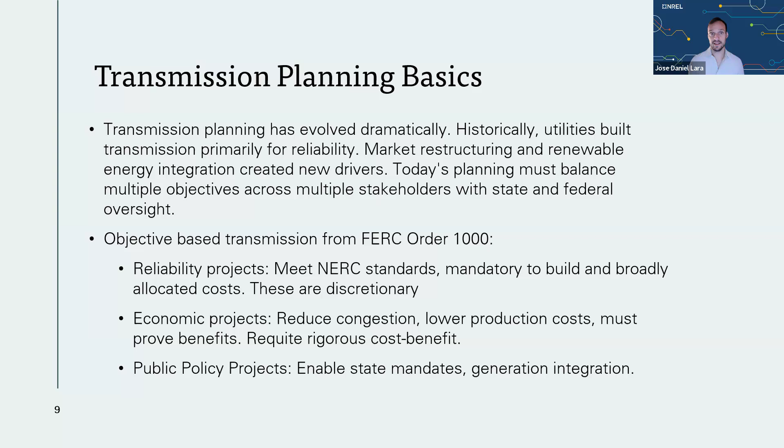And finally, we have public policy projects, which are projects that are required to enable state mandates or integrate generation and meet certain targets that states have according to their policies. So if we take this framework, we can now start understanding what kind of modeling and what kind of simulation is required in every different case to be able to answer the question of how do I assess my transmission planning effort. Let's go to the next slide.

So the other part that is important, which we're going to be talking about in this presentation, is this new terminology that shows up a lot, which is called GETs, and understanding how GETs get incorporated in transmission planning. We're going to look at the process, understanding that these technologies are operational. They change how the system operates, and how do we actually incorporate them as a way of evaluating costs and benefits. Also, we have to understand that GETs, depending on how they're deployed and in conjunction with a broader portfolio, can actually increase reliability and include cost benefits. So let's go to the next slide.

Right, so these types of technologies are more difficult to assess because they're meant to be operating more in the two other categories that are not reliability. They're economic projects and public policy projects. So the impact of GETs is more dynamic. It changes depending on the system conditions, and it changes depending on the requirements that we have at a particular location of the grid.

So modeling gets more difficult when we have to start including this level of operational detail, and understanding how just a couple of snapshots that are reliability based, as they're usually done by the utilities, might not be able to capture their full value. And we're going to discuss different techniques that we can implement to allow us to capture the value of GETs in different contexts. Go to the next slide.

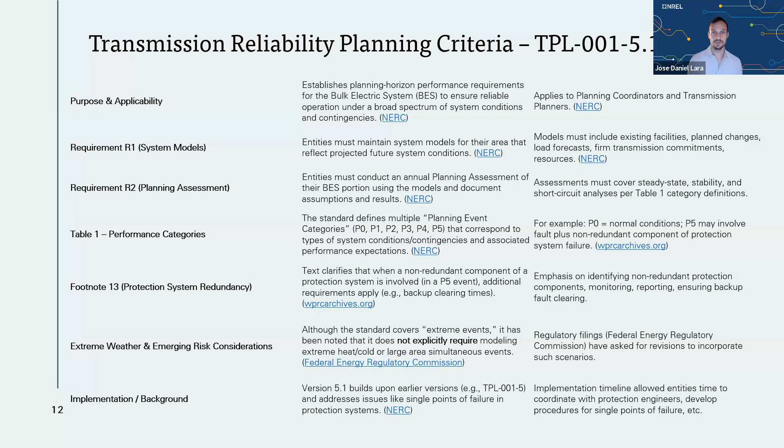Right, so throughout the process, we're going to discuss what is the current state of practice, what is the ideal case, the two extremes of what would be the ideal way to incorporate transmission planning and the state of practice, and then figure out what is a middle ground of improved modeling that includes enough fidelity to have good decision making, but at the same time is something that we can realistically solve within our organizations. Continue to the next slide.

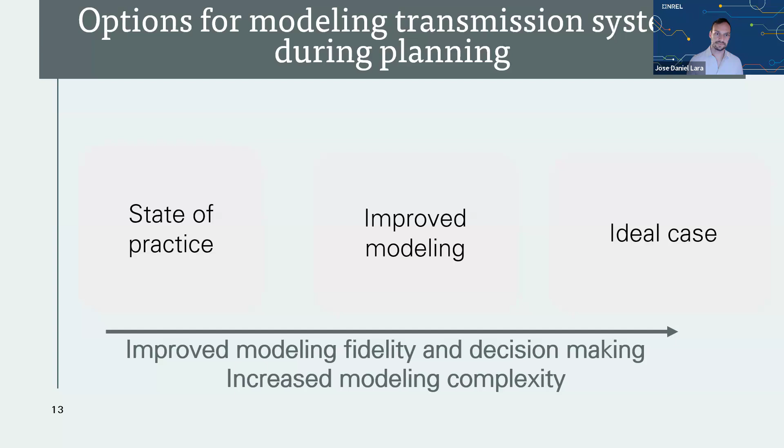So the terminology we're going to choose for this analysis is, on the one hand, we're going to have a technology portfolio. That's a collection of projects designed to address a grid need. This can include multiple new lines, can include reconductoring, and can include GETs, right? Can include different sets of additions to the grid, can also include other types of components like static VAR compensators or capacitors.

And then there's the set of scenarios, which are the assumptions under which we want to assess the value and performance of this portfolio. So for example, we want to understand if the portfolio that we're choosing is capable of sustaining different degrees of renewable energy integration. We want to understand if this new portfolio will help with integration of new load, or can it actually make us go through some kind of winter storm or some fire events in different areas, right? So every portfolio has to be assessed across the same number of scenarios. So let's go to the next slide.

And in the ideal case for transmission planning, if we had this capacity that doesn't really exist at large scale, we would actually plug in all these future scenarios and all of these technology portfolios, and there would be some singular model that is able to make the decision for us about what is the optimal technology portfolio and deployment schedule. So this problem, right, is incredibly computationally challenging.

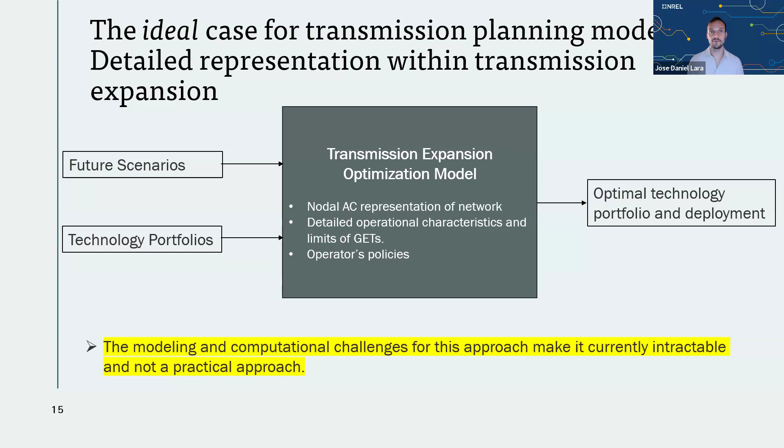It's very intractable when you start having to take into account details about AC representation. It actually starts requiring many more samples of time periods in order to capture the value of GETs. And this is something that is more research-based. So if we have this idea about this ideal situation where we can plug in all of this information and work backwards from it, we can understand the current practice and improved modeling alternatives. So let's continue going forward.

So the existing state of practice, the other end of the spectrum, is that we put these technology portfolios and future scenarios into what is called production cost modeling. And that gives us some idea about the costs and benefits from the economics perspective of these portfolios in conjunction with other assumptions about what is my fleet, what is my increasing load, and so on.

And in a separate track, some of these portfolios and some predefined snapshots and scenarios get put into power flow analysis where reliability analysis is conducted. And the only answer we get out of it is whether the solution meets the reliability constraints. So whereas the production cost modeling is almost regularly conducted by PUCs or energy offices or state agencies, the reliability analysis has historically been left to the operators and the utilities to conduct.

So we have two questions that we have to answer in conjunction: what are the reliability impacts of a particular portfolio, but we also need to answer what are the economics. And historically, this is done in a disjointed fashion, right? So these processes that happen separately are the exact opposite from the last slide that does all of them together. So let's go to the next slide.

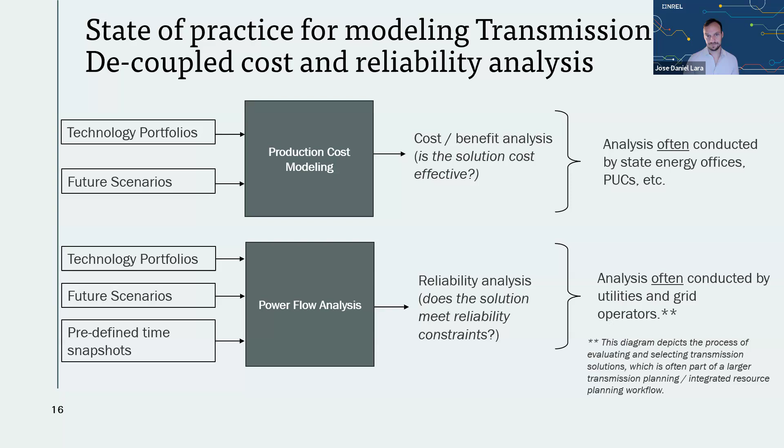Now, the shortcomings of this, again, is that a lot of these IRP models and all of the economic models are actually not even a full representation of the transmission grid. So when it comes to transmission planning, the planners actually run zonal models, they calculate the IRPs, they do these kind of processes of understanding what the generation fleet looks like. And the nodal models sometimes don't actually reflect the details that went into those models, and the IRP doesn't reflect the reliability constraints and reliability concerns that can come from the utilities.

So this limited ability to capture the value of both of the modelings within the same framework creates a lot of the challenges that we observe, where there's a lot of back and forth between the utility or between the ISO and the local states and different regulators to try to converge to a collection of scenarios and portfolios that make sense for both types of modeling approaches. So let's go to the next slide.

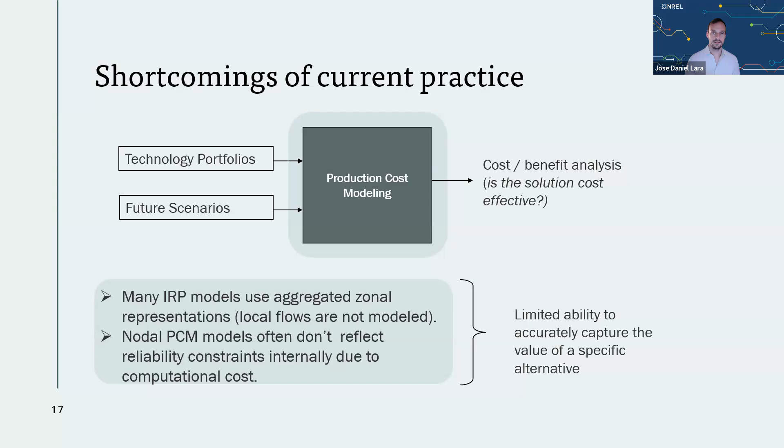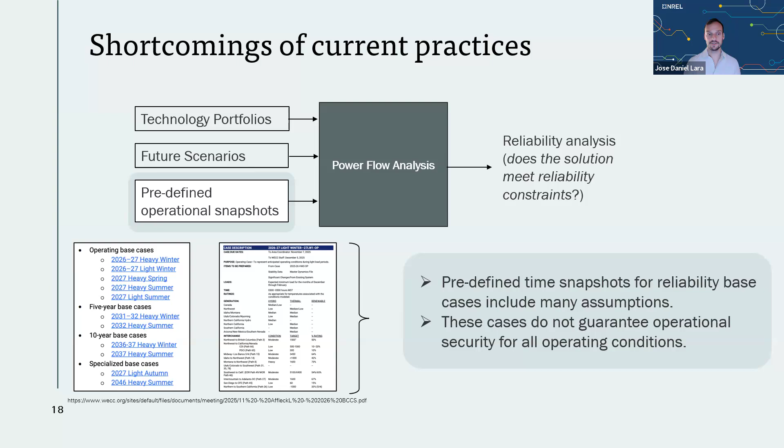So these predefined snapshots have a reliability base case and have assumptions that don't match the actual operational regimes observed from the previous modeling. And the reality is that even though these analyses are done to conduct the investments that we want to do for reliability improvements, they actually don't provide any guarantees that those reliability improvements will be met, given that there is no input from operational conditions obtained from the previous simulation. Continue to the next slide.

So what happens is that then you have, again, this iterative planning process with power flow, where some capacity expansion happens, some analysis gets disaggregated. That disaggregation process in itself sometimes is not fully transparent or not fully clear about how it happens, and requires a lot of manual input. Then you conduct your transmission expansion analysis, conduct your power flow, and if it's not sufficient, it goes back into the expansion, and then you have to aggregate again to put it into your expansion program, disaggregate it again. And this cycle of models can actually take a long time, right? So this is what we observe, big cycles of planning processes in the industry that can take multiple years. Let's go to the next slide.

Right, and there are challenges like including the power flow, and checking that the convergence of the power flow works for multiple PCM results is not easy. We have these large residuals that can end up from our Newton-Raphson. Our tools are not necessarily meant to be able to address potential differences between the outputs coming from the planning scheduling and the actual physical AC power flow that we want to resolve. So developing the capabilities that are needed to be able to solve these things in conjunction with each other is one of the bigger improvements that we can have when we want to evaluate these things.

We can actually go and say, how can I take my power flow risk, my PCM set points, the operational snapshots that I obtain from more realistic operation conditions, and put it into my power flow. So this is one of the pending challenges that the National Lab will work at trying to resolve and try to deploy in industry to improve the current state of practice, and a lot of the work that we do under this TA program. Let's go to the next slide.

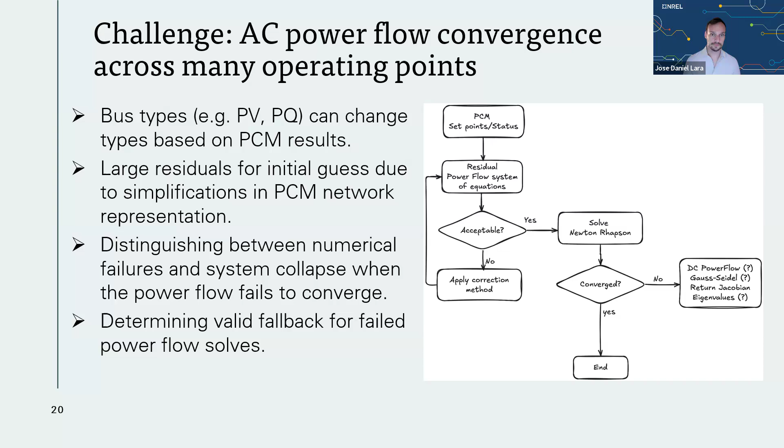Right, so what we understand is we can have this iterative process, and this is kind of like an improved state of practice where you have an unconstrained PCM that then runs into a DC power flow. We obtain new constraints from the power flow, incorporate them into the production cost modeling, run contingencies, obtain new constraints, and slowly but surely, the addition of new constraints informed by the power flow allows us to implement those in the PCM to better tighten up our cost assumptions.

So this transition between the different operating conditions is basically very challenging, but it's a much better process than having fully disjointed approaches, because we can make sure that the costs that we're observing in our PCM actually reflect the system transmission constraints as they happen in practice, right?

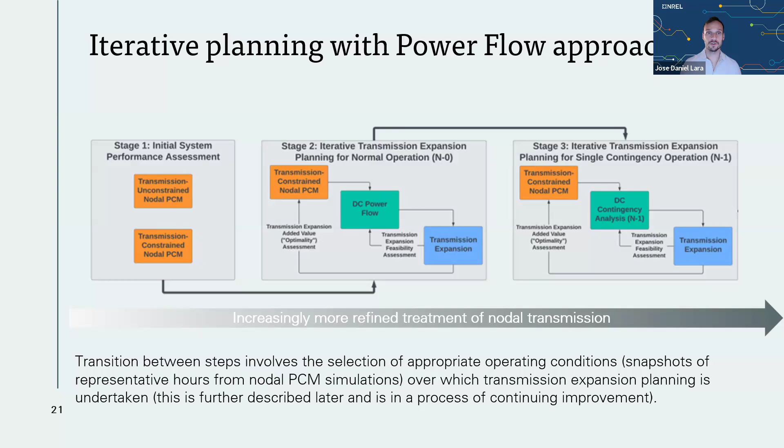So the more refinement you do and the more inclusion of the reliability aspects into your modeling, the more costly it becomes to run this analysis and the more simulation time that you need, because you're going from simple unconstrained systems to more constrained systems as you move forward. And this is the process that, for example, was conducted for the National Transmission Planning Study.

Let's continue with the next slide.

Right, so this is where the improved modeling and this reliability-aware production cost comes to play. So what we do is that we actually run a production cost modeling that, instead of evaluating the contingencies outside, we actually integrate the contingencies inside of the model. So we get the technology portfolios, the future scenarios, and these different scenarios get evaluated in the reliability-aware production cost. Once we get the reliability-aware production cost, we get a much better picture about what are the restrictions that will be observed in the dispatch of our units given those reliability constraints.

We then can also go back into power flow analysis and understand if there's AC power flow challenges with it. And given that we obtained already reliability constraint outputs from the reliability-aware production cost modeling, the likelihood we get a proper power flow result gets higher, right? So this is what we call power flow in the loop, and it's able to capture these reliability impacts across a wider range of operational conditions.

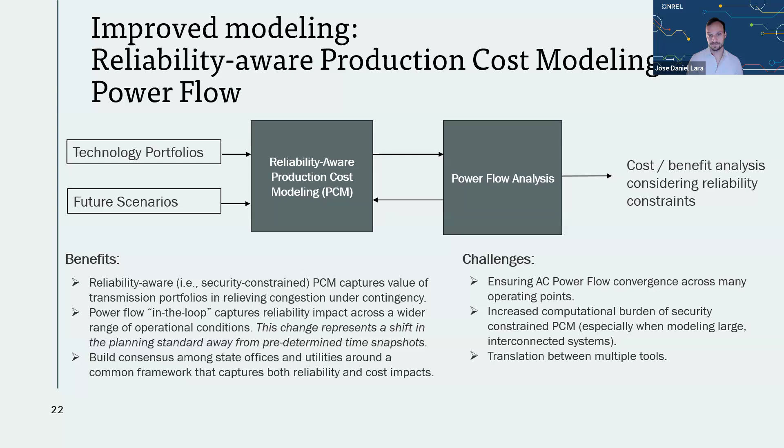So it becomes easier to build consensus across the state agencies and the utilities because this common framework answers both questions: what are my cost benefits, including reliability constraints, and also some sense of whether those reliability constraints will actually keep the system safe once I conduct the power flow analysis. So let's go to the next slide.

Of course, this process can be more computationally costly, but in many cases, a lot of these analyses are conducted within regions. For example, different states will want to assess their own state conditions. So Virginia might need to know what the transmission requirements are for its local region, which doesn't mean that we need to model all the way up the PJM grid that extends to Illinois. So we can tackle the challenge of the computational increase by having a reduction of the system.

So we can take equivalents around our study region and simplify those areas such that we can reduce the size of the problem without necessarily losing the key components that we need to understand transmission impacts within our areas. So we basically conduct this process of aggregation where we take the areas of the network that don't greatly impact the local study region, and we can then include the security constraints within the study region pieces, right? So in this way, we can still create this capacity to have consensus between the utilities and the state agencies and tackle some of these challenges with security constraint models that can be computationally costly to solve. Let's go to the next slide.

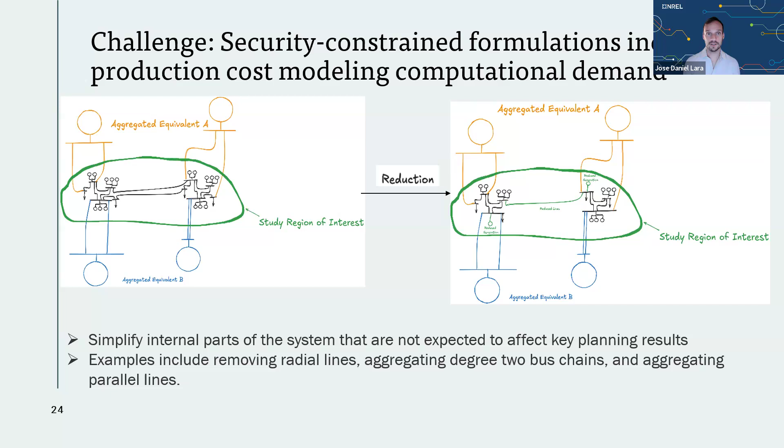So the whole procedure goes from these big systems to smaller ones that still answer questions about the specific lines and projects and portfolios, and we can obtain results that even in the optimization side are simplified, and we can evaluate the full power flow. And the utilities and the agencies can communicate with each other about the capability the system has to operate correctly and within the reliability standards. Let's go to the next slide.

Right, so in conclusion, what we've seen is that there is a need to marry these problems of economic cost benefit with reliability analysis. There's a state of practice today that's decoupled cost and reliability that creates a lot of churn and a lot of iteration, and challenges of two processes that don't really talk to each other. We know that there is an ideal case where everything gets into the same bucket and these massive models can make the decisions for us all together.

And in the middle, we just described two potentially improved modeling approaches: one where the reliability constraints are integrated outside of the PCM modeling, and one where the reliability constraints can be implemented inside of the PCM modeling, such that the two considerations can be evaluated at the same time.

I'm going to now pass it on to Vince to talk about distribution planning.

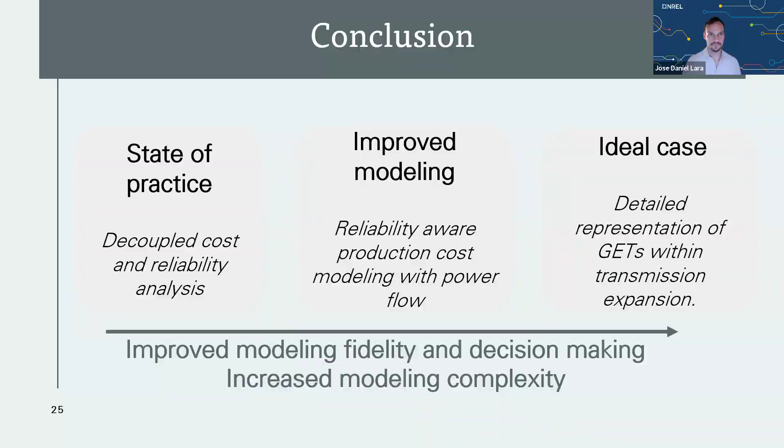I'm going to focus mainly on system planning from a distribution perspective, and I really hope to show why the shift that is happening these days from traditional siloed planning of transmission and distribution systems to an integrated approach is necessary. Would you go to the next slide, please, Raphael?

So every system level is feeling the pressure from these four spending drivers: aging infrastructure, resilience, and growth. Growth from existing customers as well as new customers, and especially these days, data centers. Distribution, transmission, and generation planners are all dealing with these, and by integrating their planning, there really is potential to save billions of dollars through multi-objective investments rather than siloed decisions surrounding aging infrastructure, capacity expansion, and resilience. Bottom line is industry needs to move from siloed planning to integrated planning.

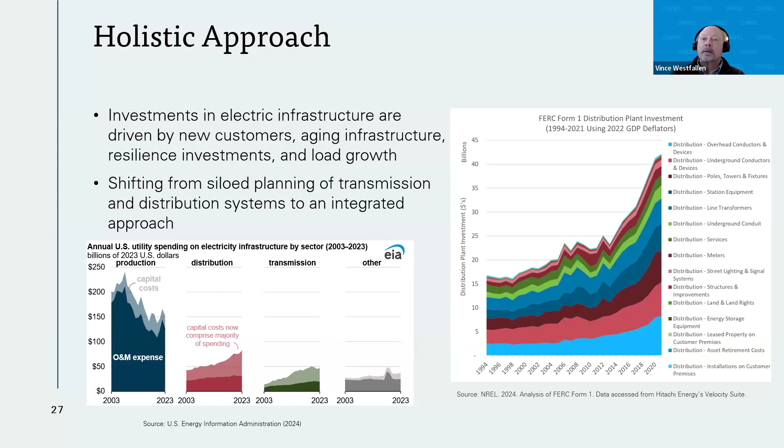Next slide, please. I want to look at four of the main challenges that are front and center in distribution these days. Next slide, please. First, we have the blend of these two issues: aging infrastructure and weather. Facilities need to be updated, and we want those updates to enhance reliability and resilience.

The chart on the right shows a year-by-year average SAIDI, that's System Average Interruption Duration Index. Now the blue at the bottom of those bars is without major event days. Light blue is with those major events, and green at the tips of the bars is loss of supply. Loss of supply is responsible for about 20 minutes of annual outage time. Blue and light blue are distribution outages that account for about 300 outage minutes each year. So you can see why reliability is a big concern in the distribution world.

This plot on the left is from some work we did last year, looking at the state of service transformer fleets across the nation. Although it's just one category of assets, it gives a good illustration of the age of equipment that's out there. When an investment is needed for a new load, justification can be pretty straightforward. Once the load is validated, planners will lay out some alternatives of what needs to be done to serve that load, and then ultimately what was chosen and why.

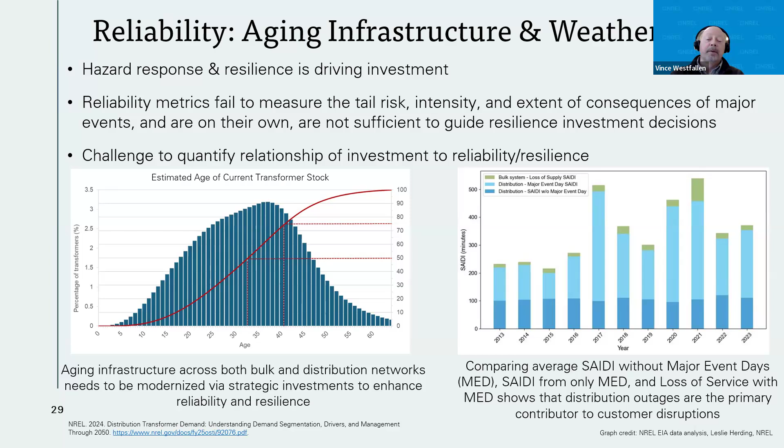Here's an interesting contrast in viewpoints. Distribution planners care very much about granularity, which substation and which feeders are going to see the growth, whereas transmission planners are interested in aggregates. And this leads to different time horizons that each team is used to. In distribution, the next 2 to 5 years are very important. And in transmission and generation, those folks are working out a decade or even longer. Forecasting is a basic activity at all system levels, but more and more, planners need to work in the other levels' domains. Next slide, please.

DER integration. As we work throughout the industry on DER integration topics, we find that this is another interesting topic. Interconnection, of course, happens in the distribution world, where distribution priorities are local impacts like feeder voltage, reverse power, and thermal constraints, while transmission and generation priorities are bulk system impacts like resource ride-through, and then markets such as frequency regulation, and of course the availability of these resources. Bulk system priorities need to be identified and satisfied via local control when possible during DER distribution system interconnection. Next slide, please.

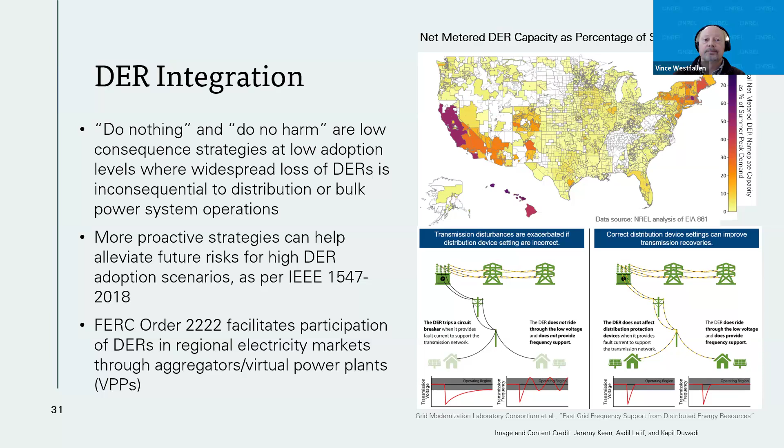With potentially orders of magnitude increases in connected devices operating autonomously, and the vast majority being owned by customers, this presents a lot of hardware and software uncertainties for all of this new equipment. Cybersecurity for the evolving grid is and will continue to be critical. Next slide, please. Next, we're going to move on to some of the trends that we're seeing in the industry as utilities grapple with these challenges.

Next slide, please. Integrated distribution planning. As I said earlier, integrated planning really has potential to save billions of dollars through multi-objective investments rather than siloed decisions around aging infrastructure, capacity expansion, and resilience. And this can happen by making these practices more cohesive, inclusive, and transparent. It's tough to just touch on this topic and try to do it any kind of real justice.

As we've worked with utilities and regulators in the integrated planning space, I would say that integrated planning involves advancing these activities in two distinct dimensions: in depth throughout all system levels, distribution, transmission, generation, and you could probably add customer also. And then in breadth, integrating needs and objectives that are beyond what is traditionally included in planning.

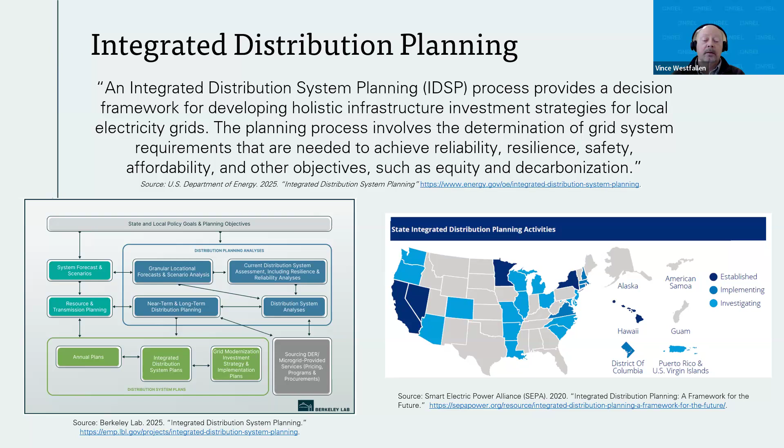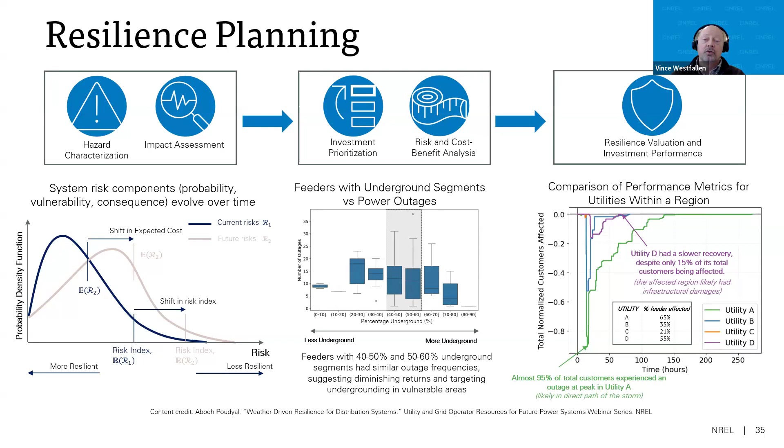Next slide, please. Resilience planning incorporates new ways of looking at outage events, focusing not just on single outages, but on the entire event evolution, from the beginning of a storm all the way through to final restoration. And as I mentioned, new ways of looking at things requires new ways of measuring them. Again, it's a new challenge to planners to justify these investments and to quantify the relationship of investment to reliability and resilience benefit. We're seeing that regulators and utilities are coming up with some pretty sophisticated frameworks and methodologies to move practices along the continuum from reliability to resilience. Next slide, please.

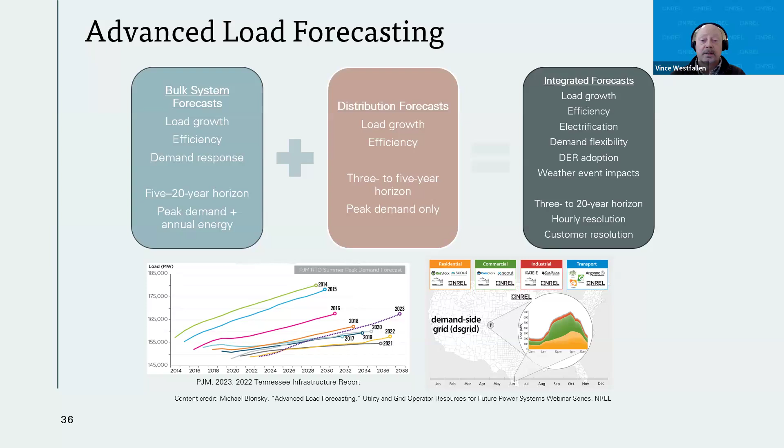You can see we have listed out here some of the facets of forecasting in these siloed realms. And then on the right, what integrated forecasting encompasses. Its methods and processes, just like it has always been, but now it's also considering scenarios and uncertainty. And of course, there's data. It takes new tools that can perform these tasks with these massive data sets and provide meaningful, harmonized forecasts between system levels. Next slide, please.

Interesting dynamics at play in the area of DER interconnection for T&D, as bulk system planners are starting to have to pay attention to aggregates of these distributed resources. And distribution planners have to start thinking about the aggregate effects that their DERs are having at the bulk level. System standards and requirements are needed to satisfy both. We're seeing things like flexible interconnection provisions and DERMS to manage local system constraints, and at the same time, things like FERC Order 2222 to make way for useful aggregated operation at the bulk level. Next slide, please.

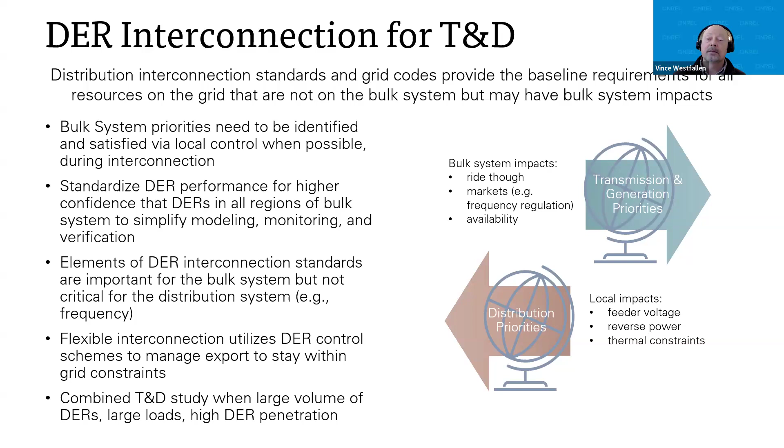All of that leads right into this next slide here. Virtual power plants and distributed energy resource management systems provide real-time control of distributed resources to enable better control of DERs on the distribution side, and with VPPs, integrated dispatch to meet the needs of the bulk power system. Next slide, please.

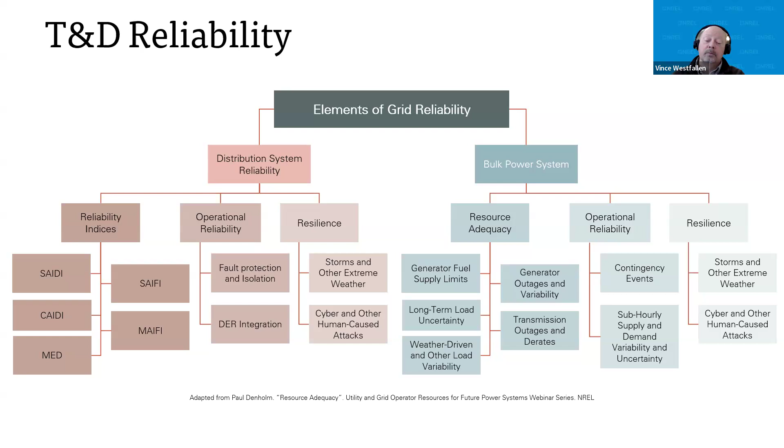Integrating planning is a natural development. Integrating more objectives and more topics into planning, and integrating planning activities across system levels is critical these days.

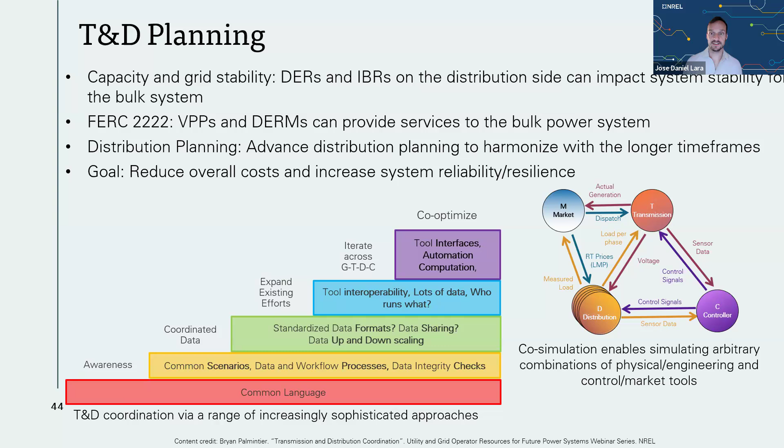Thanks, Jose. To close things out, as Jose mentioned, this is a complex issue with a lot of moving parts. There's sometimes information asymmetry between, let's say, the utility and the regulators who are reviewing the planning proposals, the end results of capital investment plans, et cetera. And so the Department of Energy has seen fit to provide technical assistance to regulators and state policy makers in energy offices on a whole host of different topics, including those discussed today.

If you need more exhaustive support, you can move on to our expert match program. There you get up to 100 hours of support. That potentially could allow for more formal review of, let's say, a filed IRP or transmission or distribution system plan, among other things. Maybe even some minor amount of technical analysis.